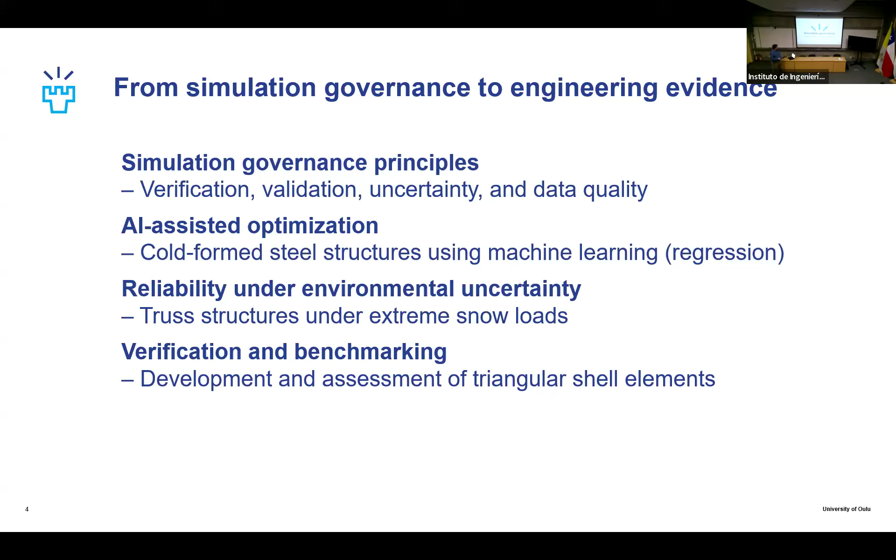So these are the terms that are in the engineering community sometimes quite formally even defined and perhaps even standardized: verification, validation, uncertainty quantification, and nowadays, I guess, data quality.

This is of course a very basic underlying assumption which might sometimes be forgotten, but every time we do any simulation, trying to support decision making, the underlying assumption is that these results are reliable, credible, and can be used as a basis for decision making.

So this simulation governance as such is both a managerial and technical function. I think this is very important for the managers leading these construction projects or engineering projects.

These core elements were mentioned: verification, validation, and uncertainty quantification, UQ. And the claim is that in this era of AI-driven structural engineering, these are more important than ever.

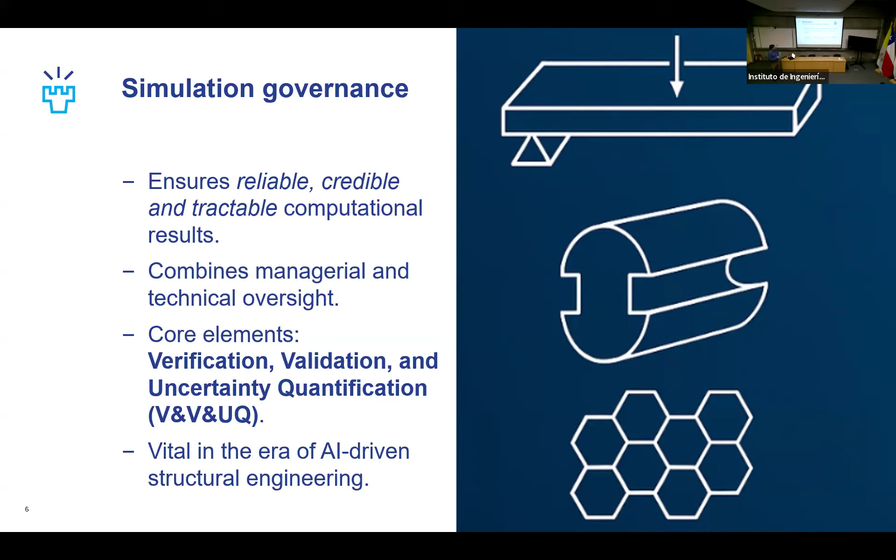This terminology can vary and is used differently in different contexts, but the American Society of Mechanical Engineers, in their standard, defines verification as concerned with the question of whether the model is being implemented correctly and whether there are no errors in the numerical solution. This is, in some sense, a traditional problem for numerical analysis in computational mathematics and mathematics in general, ensuring that we are solving the equations correctly.

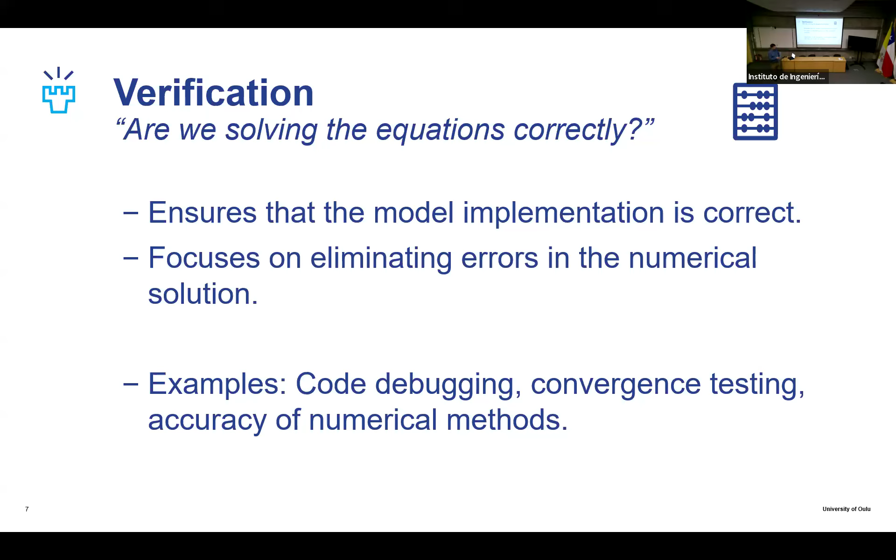Of course, one could extend it also to analysis of the model in the first place, regarding existence and uniqueness of solutions. But the term validation refers to whether the model is a realistic representation of physical reality, and this most often involves comparing simulation results to experimental data, physical tests, and real world benchmarks in the field.

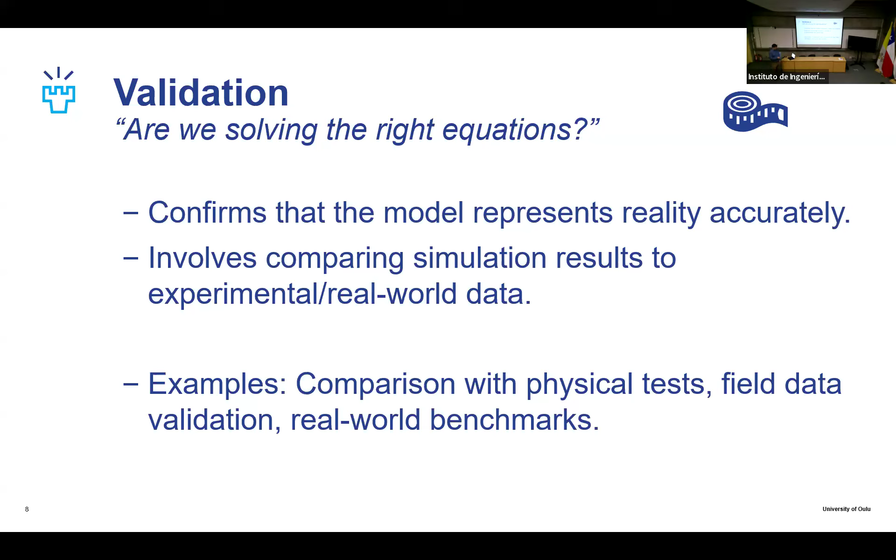The uncertainty quantification could be posed as a question of how confident we are in the results, as a result of the various uncertainties in input and model parameters and their propagation to the end results, and as a result of incomplete knowledge or assumptions.

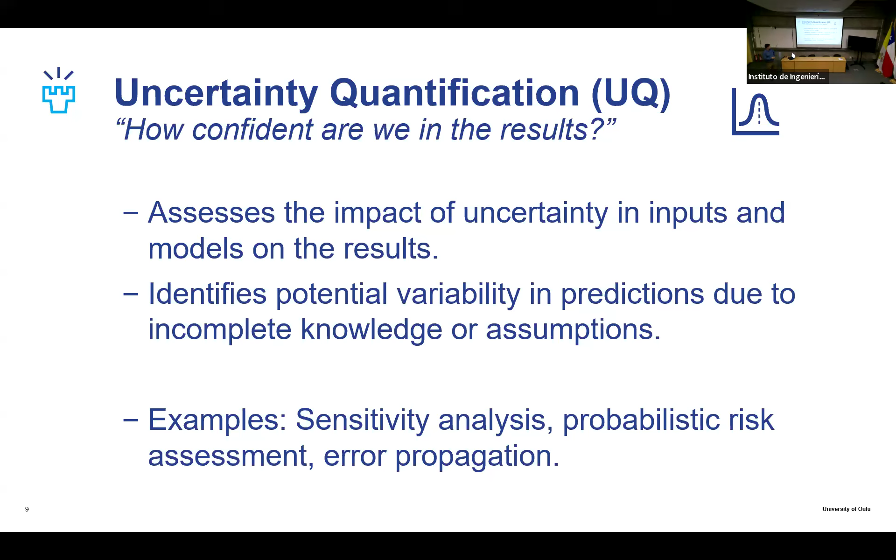But then, of course, my civil engineering background concerns large infrastructure and large structures. For instance, certain constructions are unique bridges, specific bridges constructed only once, and there isn't mass production or the possibility to study all aspects in a lab. So it's a one-time experiment.

So one really has to be confident in the simulations, and see what testing can be done, and analysis, and bring these together. These large-scale projects are very difficult in that respect compared to certain individual components.

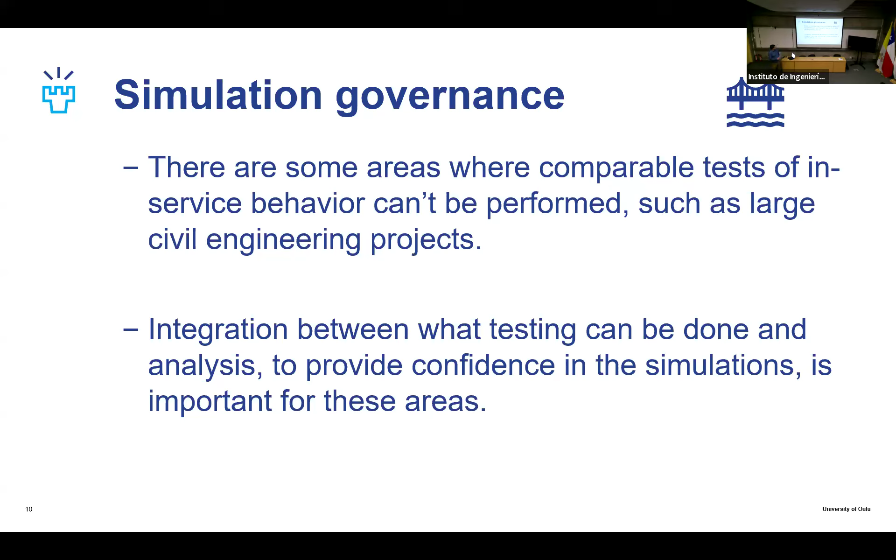So now proceeding to AI-assisted optimization. This is a very applied study related to specific cold-formed steel structures and their optimization using machine learning. First, where the motivation comes from is again a provocative conceptual picture.

There is heavy pressure to optimize structures, reduce weight, and things like that, arising from sustainability considerations. So here is a typical situation for a typical structural engineer.

Suppose one flight over the Atlantic from Europe to New York is of the order of magnitude of 1,000 kilograms CO2 equivalent. By reducing dairy, one could save maybe 2,000 kilograms. Stop driving a personal car, maybe 3,000 kilograms. But if it's possible to reduce 20% of structural embodied carbon...

Over a certain assumption that there's 5,000 square meters on average that the structural engineer is responsible for, with a certain amount, that boils down to 200,000 kilograms. So a professor who teaches 10 structural engineers a year to do that, you can put a zero at the end and then start eating. Anyway, this is provocative, but this is the kind of motivation to start to optimize and reduce.

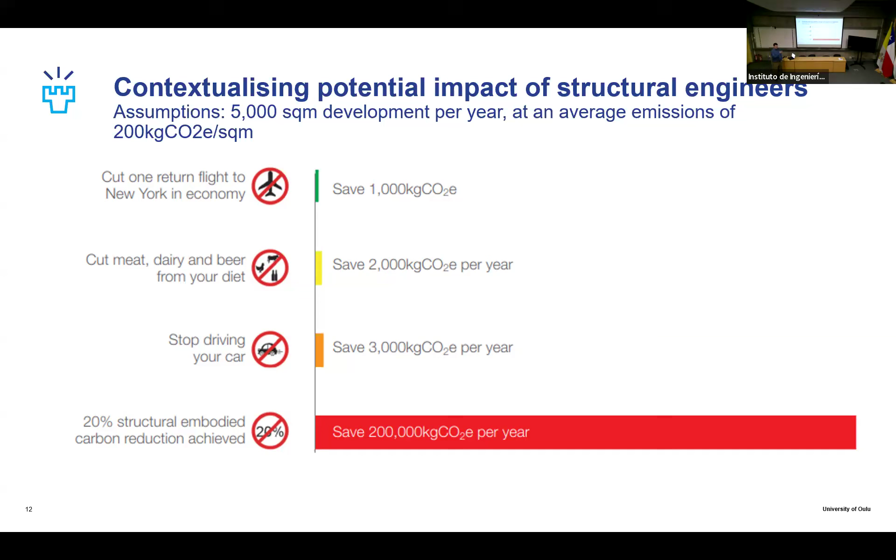The key thing is to do this without the bridge falling down, right? Of course, yes, and that's the point of the talk.

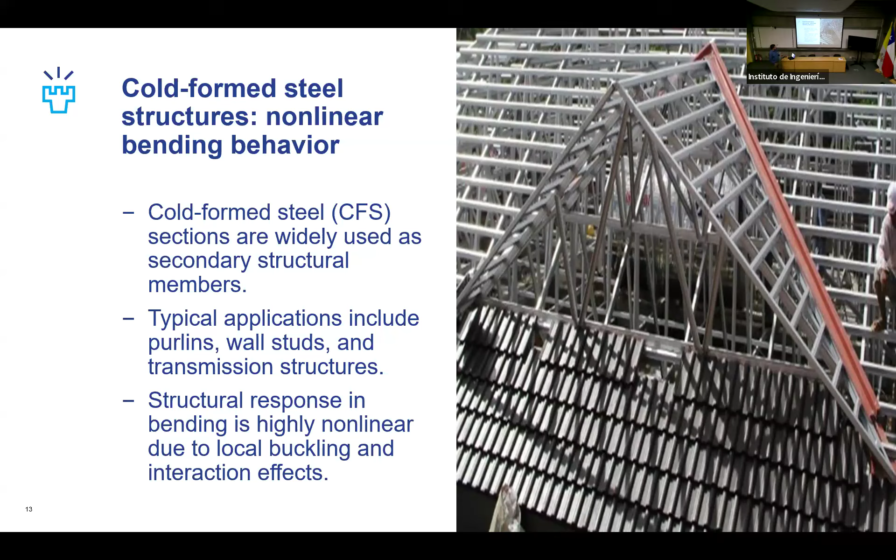Why this is good for machine learning is that because these are very thin, they are highly susceptible to buckling and geometrically nonlinear effects, and that's an area where these machine learning tools could be especially useful.

So it's quite simple in a sense—we are analyzing this type of C profile. These lips here don't play a significant role, they're a little exaggerated here, but then there is this stiffener here.

So the parameters are basically the global overall dimensions, which are partially dictated by the application, and then there's the thickness and this angle, and the idea here is...

What has been done is that finite element analysis is applied to generate a dataset, based on 140 configurations representing realistic profiles.

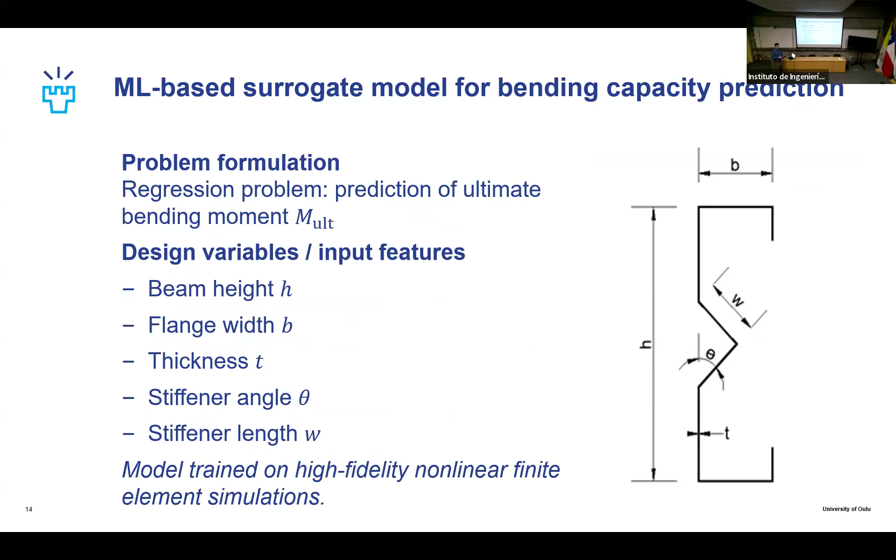So now the point is that we build this machine learning and regression model to predict the moment for any configuration based on this generated data set.

There is also some statistical analysis done related to these various parameters, checking if there is a correlation between them, and there is some correlation between these overall dimensions, partly arising from these constraints we believe, but mostly they are not correlated. So it seems that the dominant nonlinearity really arises from the actual structural response.

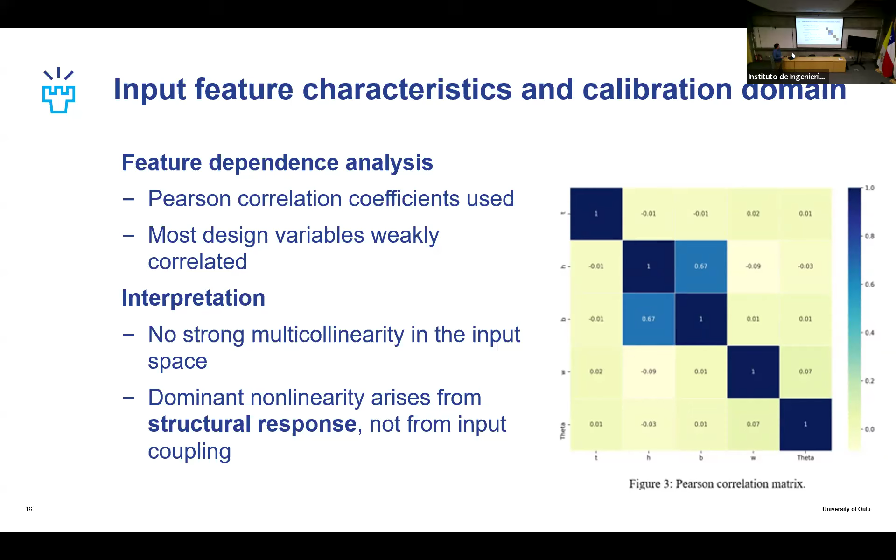In the paper, there is this comparison, lots and lots of comparisons about different models. The classes are well, simple models, so basically starting from linear regression, least squares, and other regression-based predictions. And then there are the so-called ensemble models, random forests, and different machine learning algorithms. And then as a third category are these kind of models of models that are a combination of those three other models.

Let me interrupt just to be clear. Here, the inputs that you're considering are the things you mentioned, thickness and whatever, and the output is the ultimate stress, right? Yes, ultimate bending moment, like a stress resultant. But the inputs are these B and theta. Exactly, these parameters, purely geometric parameters, are inputs, and we try to construct a function M ultimate as a function of these ones.

And these prediction errors, error variability, and robustness across the calibration domain were considered as comparison indicators. And now, this bias—we take this so-called high fidelity FEM as our reality. In finite elements, we trust at this point.

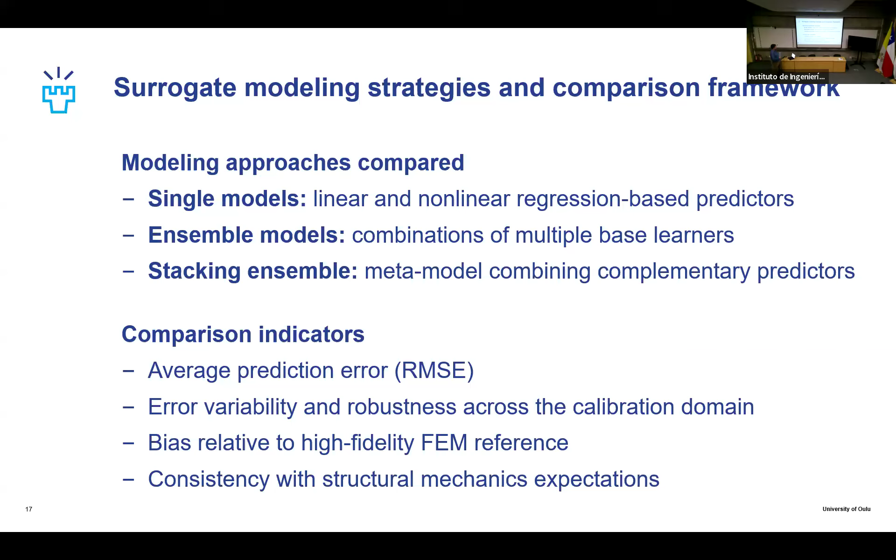But the observations are such that for these simple regression models, there is a very large variability in terms of those indicators, those root mean squares, and biases. These ensemble models are better, and then by stacking them together, it is possible to have so-called best generalization in terms of these average errors. But as the data shows, even if there's a low average error, there can still be large deviations in the capacity, like outliers.

And also what we observe is that these surrogate models are not conservative. Well, of course, there's no reason to believe that they would be conservative, but in structural engineering it's a very conservative field. So this is also a bit of a game stopper, that if you show something that is not conservative, for many designers who are responsible, safety critical or non-conservative always means no. What does conservative mean? It means that we predict smaller capacity than it actually is. So on the right side of the prediction, conservative, yes, because now we are predicting this M ultimate as the capacity. So if we overestimate it, then we are not conservative.

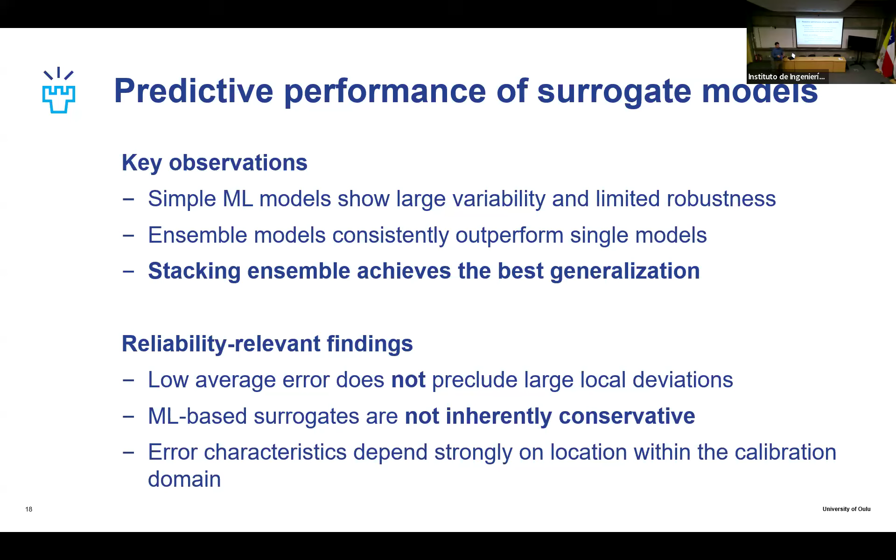But still, this represents the data, but in many areas of this domain of calibration or domain of validation, it is quite okay. So these biggest outliers are typically near the boundaries. So especially for thick, low-height sections, there is overestimation.

But then, here it is chosen, this meta model to calculate the capacity. So if we now compare it on average in a certain set to this FEM, this is the kind of average overestimation or level of non-conservativity there, but there is also deviation and so on. So now, I did not mention this, but this DSM refers to the direct strength method that is used in American standards.

So for instance, here, this is in the design standard, and this of course makes one very happy. Yes, we are always on the same side. But even so, there are a few cases where it is non-conservative, but not very much. So that's the interpretation.

So at this point, like I said, this is mostly the capacity prediction using this type of model. There is also a follow-up work coming where this model, this machine learning model, would actually be used in the design, so that if you have B and H coming from somewhere, what kind of stiffeners should I put there. So usually the old way, there are these design curves, and you pick a point and say okay, this is the thickness I need to take, and that is something we are trying to construct, and to some extent have been successful. But we were also looking at symbolic regression, because we would get a nice closed expression - here is an expression we can use. But the expression is very long, it's still not good, so basically you need a computer to evaluate it.

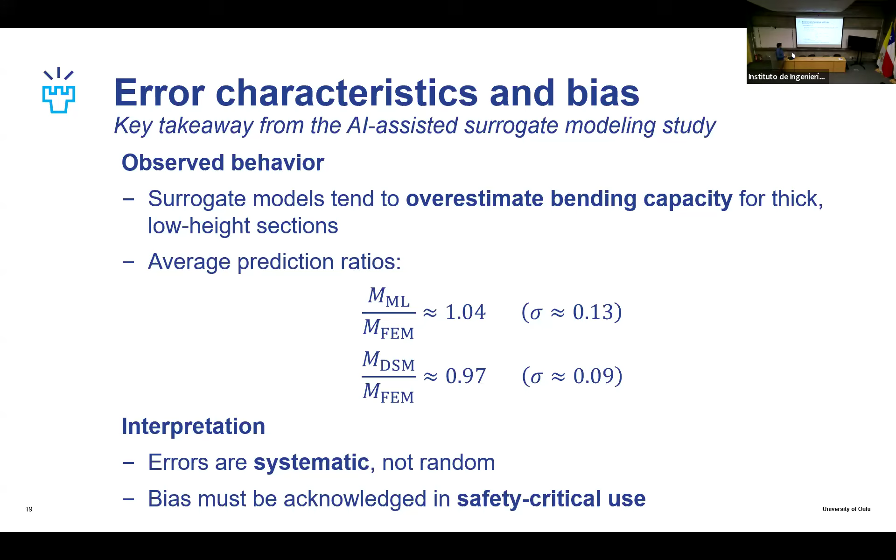Okay, so this is another fundamental challenge. We are going maybe one step too far, because maybe we should just use finite element analysis to make more realistic predictions. But the problem is that even though we know it's not so big of a deal, in field practice it's not ideal. And if you want to do structural optimization, you need to do a lot of them, and some kind of optimization algorithm needs to be there anyway. But that's where we are right now concerning this AI assistance.

I will accelerate a bit, but this was actually one of the main things, and it was in the title. I will briefly talk about reliability under environmental uncertainty, because now we saw that there is uncertainty, and here we try to really discuss it. These extreme snow loads have caused multiple large span roof failures in Finland in recent years and winters. There isn't a single reason to be identified, but they are often linked to load uncertainty, accumulation effects, and operational decisions. So needless to say, nominal design, which we were also discussing, isn't enough; we need to address this uncertainty in the actions and snow loads.

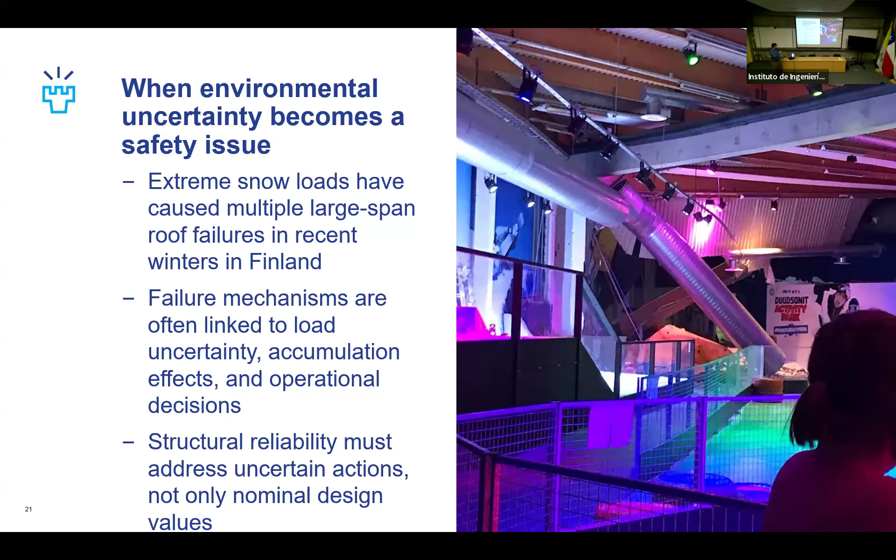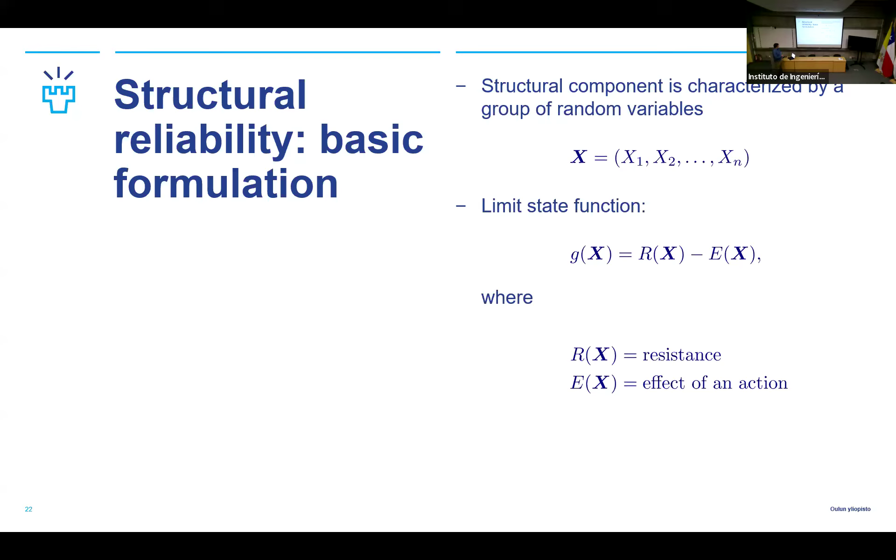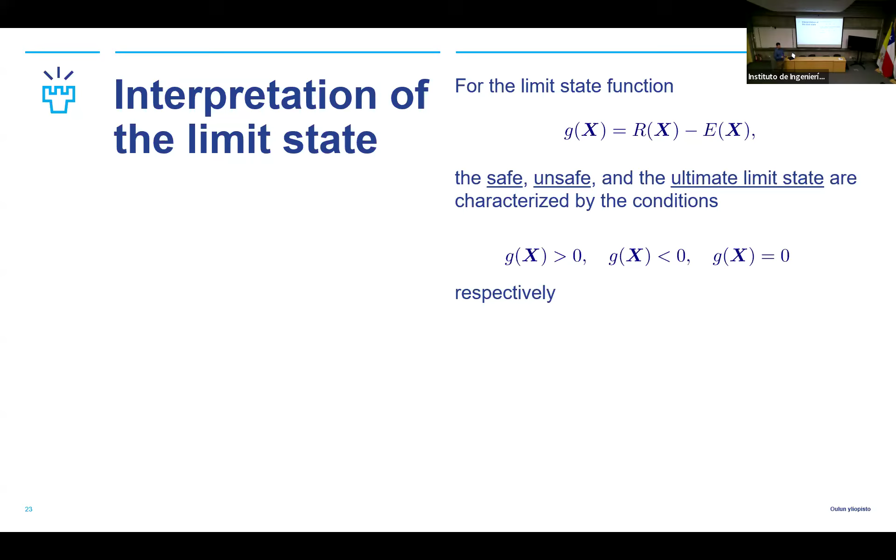So now, a little more mathematically, a structural component can be characterized as a group of random variables referring to its properties and the situation. We can define a limit state function, which is the resistance minus the effect of an action. If this limit state function is positive, we are safe, so the resistance is larger than the effect. If it's negative, we are unsafe, and at the so-called ultimate limit state, we are at zero—they are equal to each other, which is the optimal situation, where all capabilities of the structure are being utilized to resist the effect of an action.

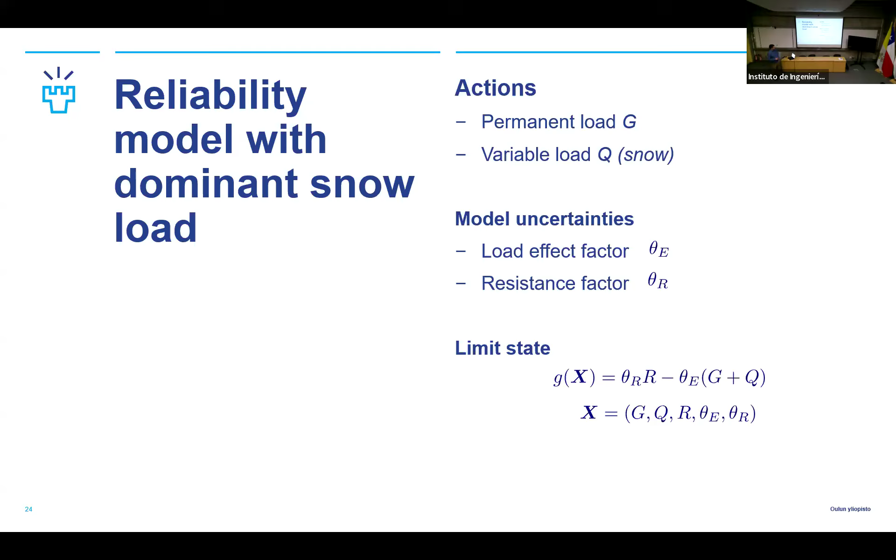So in context of permanent load and one variable load, here meaning snow, which is quite often the dominant load, and sometimes even the single dominant load in certain situations, there is typically included certain modeling uncertainty for both the load and the resistance. So we have this kind of limit state function: the resistance minus the load, multiplied by these uncertainties. So we have five component random variables—the self-weight, the snow load, the resistance, and those uncertainties.

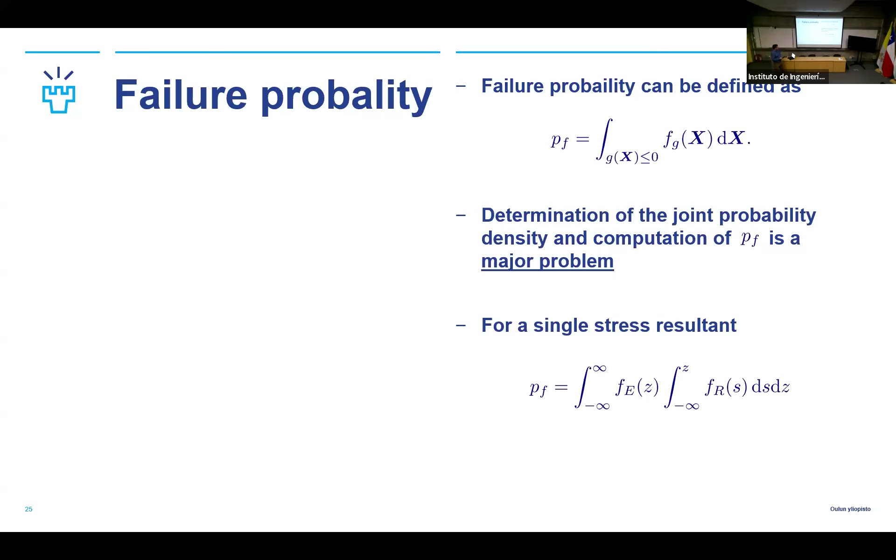And then this failure probability is defined based on the joint probability density of that random variable. Of course, in general it is a challenge to evaluate such, or even to determine the joint probability density, or to compute that probability.

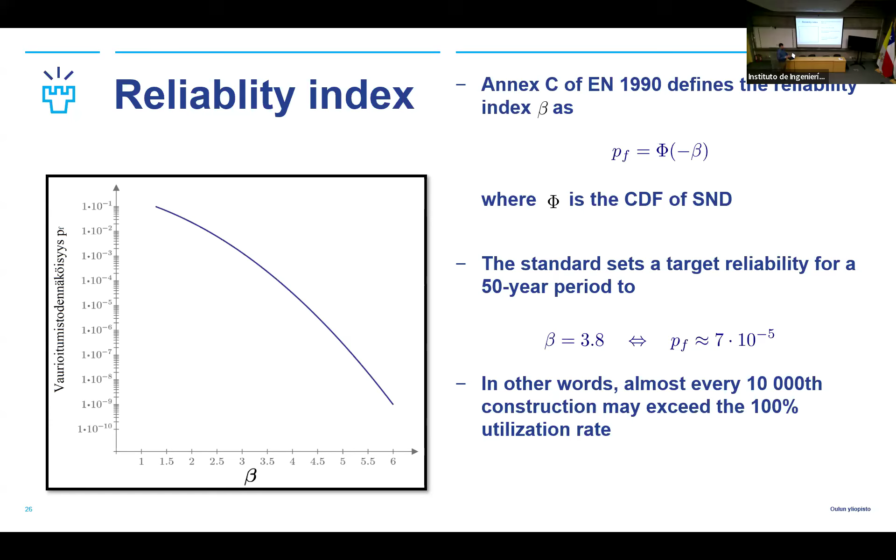But now, if we go to the standard, this is what is required in Europe. So what is the allowed probability of failure? First, the standard consideration is a 50-year time period. This is defined in terms of the so-called reliability index beta, which is defined in terms of the normal distribution. It is explicitly stated in the standard that the target reliability for a 50-year period in Europe is set to 3.8, which means that almost every 10,000th construction may exceed the 100% utilization rate. This doesn't mean the structure will collapse, but that it's being overutilized—it's in the red zone. And that's how it should be.

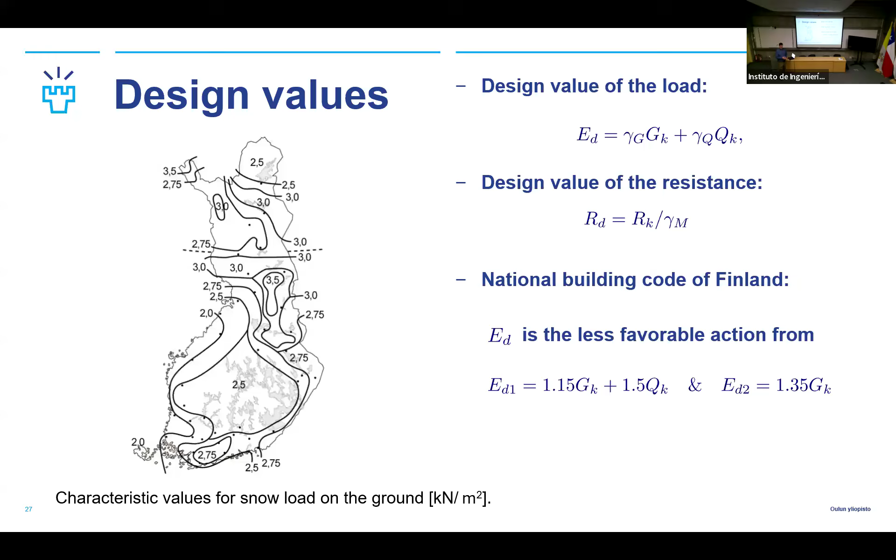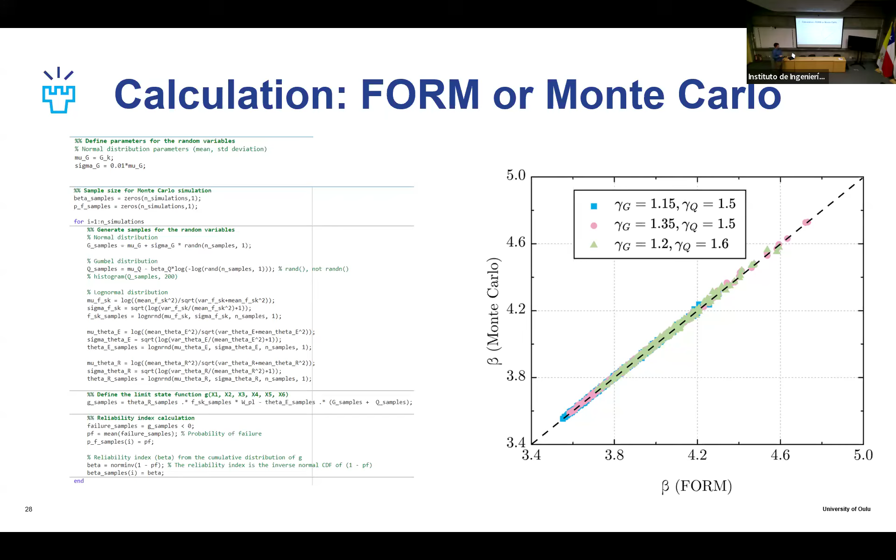When 3.8 was the target reliability, so if we are in this area at least. But I don't know, not sure if I'm able to fully answer your question.

But now what we have done, so we take a textbook truss. This is a critical structure in a sense, a large span truss would be tens of meters even, and then put the load.

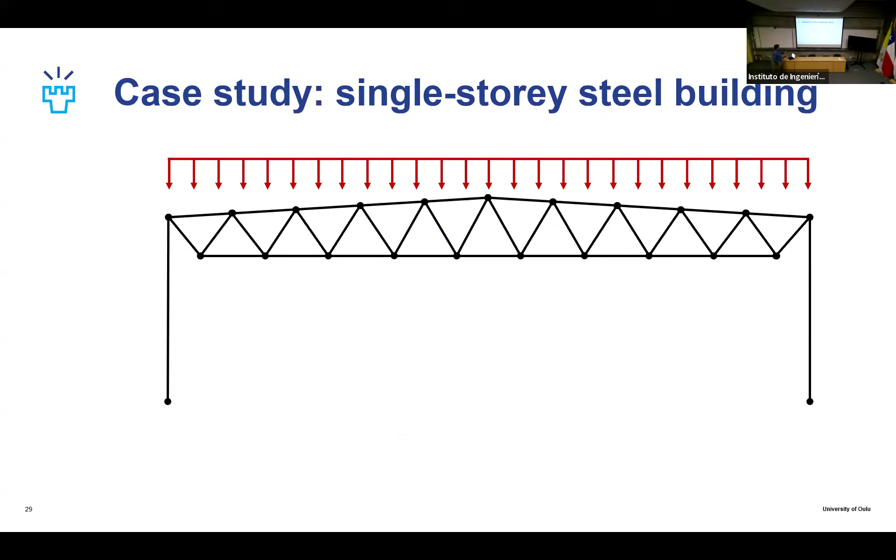So now the way to calibrate is, okay, we are just trying different combinations. And of course, underlying this, which I'm not showing, we have also the probability distributions that are being assumed.

For instance, for the snow, it's this so-called Gumbel distribution, but for the others - self-weight and the resistance - it's normal distribution to begin with. So there is some sensitivity to the assumed distribution, but actually not that much.

How does this translate to material saved or cost saving? Because sometimes just putting a little bit more - to have that you would require a ridiculous amount of material, so it's not linear basically.

Exactly, this is a very non-linear problem, and that's why we struggled, because first I did this myself only. And I just have this single graph, very generic, but I think the general idea became clear there.

But of course, every time you change the coefficients, also these rational designs change. And this is exactly what is now being taken into account, that all these designs are based always on these coefficients, because then what you can get - and there are also different steel grades - but the impact is huge.

This change then - and that's not really addressed here - but of course, if you change one of these coefficients, it will affect all designs, what kind of profiles and how much steel you need, and how much carbon you have, and so on.

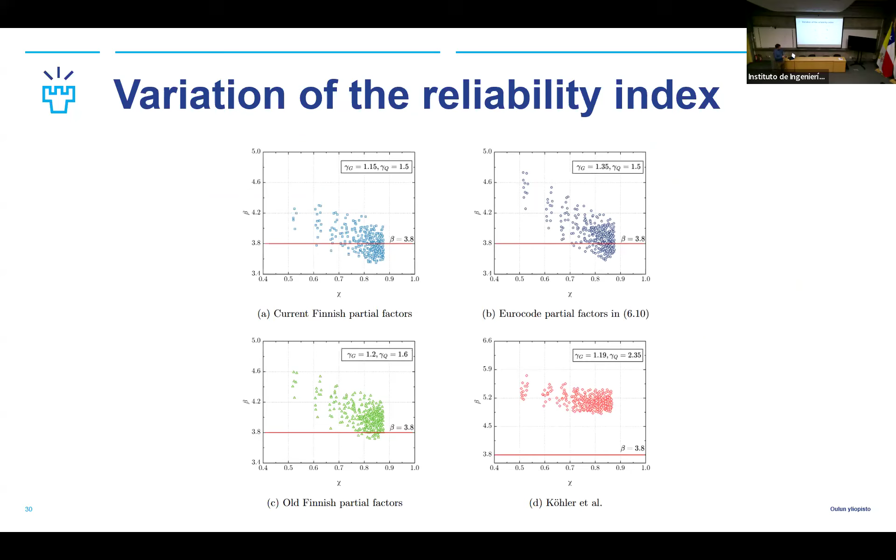Well, at least there are too many dots below the red line here. Way too many. But the question is where are these? It depends on the map. You have to be somewhere with high snow load, where this chi is high. But there are quite many points in this area. There is also more of these studies coming up on how the material influences this, but the basic result is there.

I'm running out of time, so to complete, I will just note this is partially known, but the finite element approach is still the same. We are working on something in between the strict mathematical model, rigorously defined in terms of differential geometry, and a purely approximative model based on isoparametric principles, so that we utilize the normals to calculate the curvatures inside the element to get a slightly better geometry approximation, and then transform the degrees of freedom according to these so-called assumed curvilinear coordinates that are local by local.

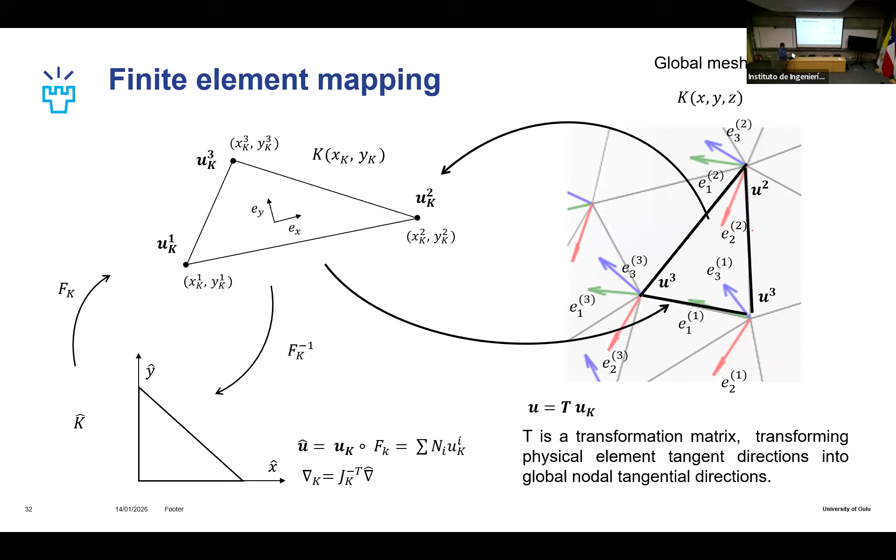But the curvature is there. This is something relevant now when we talk about the triangular element. If we take from the literature, well this is still from 2017, but seems to be the state-of-the-art triangular shell element, linear element, we get similar performance for coarse mesh, a few percent better. That's also work ongoing, more traditional computational finite elements. I started a little bit late and finished a little bit late. There are plenty of questions. Oh, thank you, there are more.

On your last slide, did you generate a new element, or did you somehow change the shell element?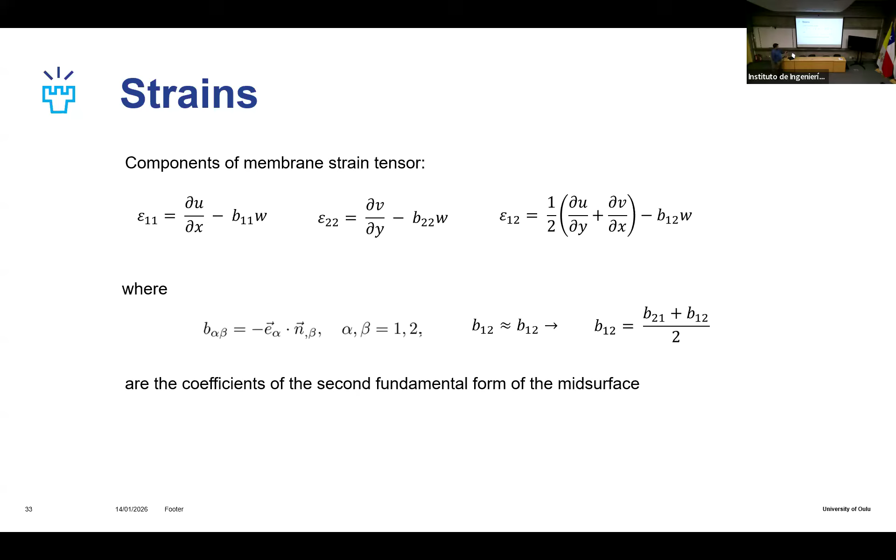This is, well, it is a new element in a sense that it is based on this shell theory where the curvature is explicitly calculated from those nodal normals. And then these strain reductions are imposed to deal with membrane and shear locking, which are also needed here, but the membrane locking is not treated explicitly because there is no curvature involved.

And the advantage of your element is that the curves are the same? Well, now I'm saying that it is at least as good as this one. And by the way, they also use cubics, so they use higher order there. Even though it's linear, they need higher order quadrature also, which is not very explicitly stated, but we really work with this linear degrees of freedom. There is the shear stabilization and a stabilization parameter is involved, but it is what it is. So it's not conforming. It's non-conforming, but it's more conforming.

That was where I started from. It's not non-conforming, but it's more conforming. And of course, the question is: conforming to what? If we have an idealized shell model where the geometry is based on differential geometry and parametric mapping, and not approximated by finite elements, these nonlinear problems come up.